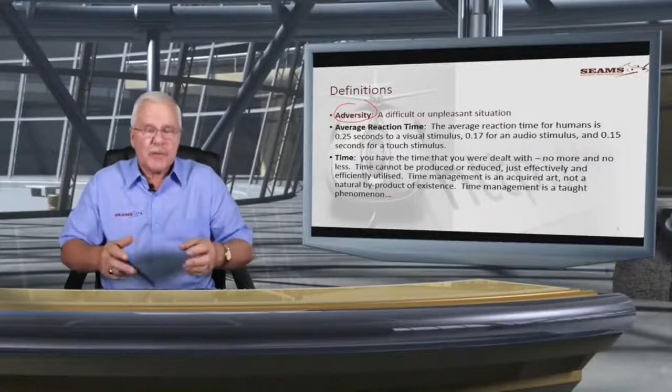All right, so before we start, there's one or two definitions we've got to go through. I'm talking about adversity. Adversity is simply a difficult or unpleasant situation. So when I talk about being exposed to adversity, it's the stuff that's not nice.

The interesting one here is the average reaction time. You know, for humans it's 0.25 seconds for visual stimuli. This is very interesting to me. Then it becomes less, 0.17 for audio, and 0.15 for touch.

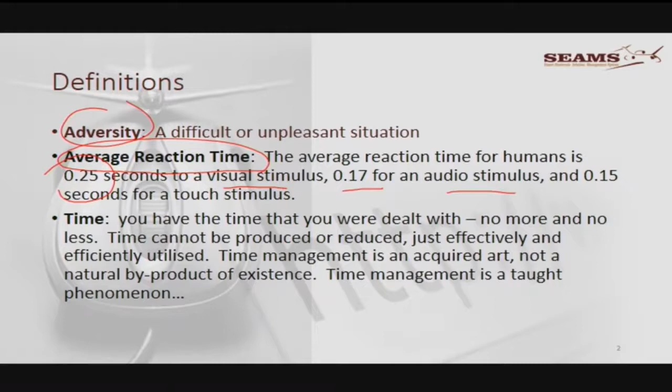Okay, so it's not just for ladies. Men, you're sensitive to touch as well. But what the hell is the problem then? Because that's quite fast. If we can react that fast, why have we got problems sorting stuff out?

Well, these tests are done under sterile conditions, where we're waiting for a light to go, and when the light goes, we react, when we feel this, when we hear this, and so on. So remember, these were tested under ideal conditions, and that's not where you and I fly.

It's noisy. We're after takeoff. We're busy cleaning up the aircraft. We're busy with power settings. We're probably busy with flap retraction. The passenger probably talks. The tower's talking to us. So that's one hell of a complicated environment.

Let me just put this cell phone here on quiet. Yeah, it's the way that we communicate, sorry about that.

All right, time—how long does it take then? You know that most multi-engine helicopters, when they do out-of-ground-effect single-engine tests, they give you 3 seconds. When they cut one engine, you can count 1001, 1002, 1003, and then the RPM will be at the optimum, but that optimum is also sort of the minimum optimum, and then you really have to react.

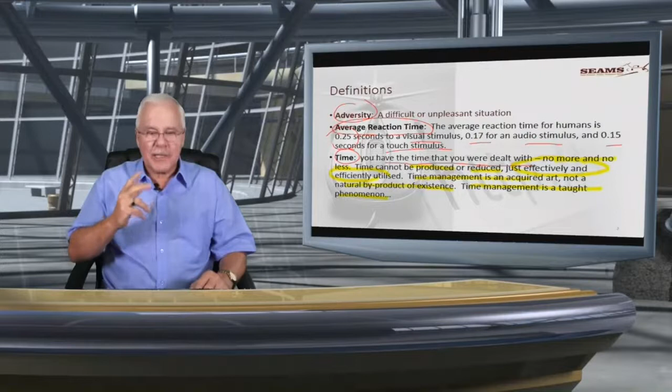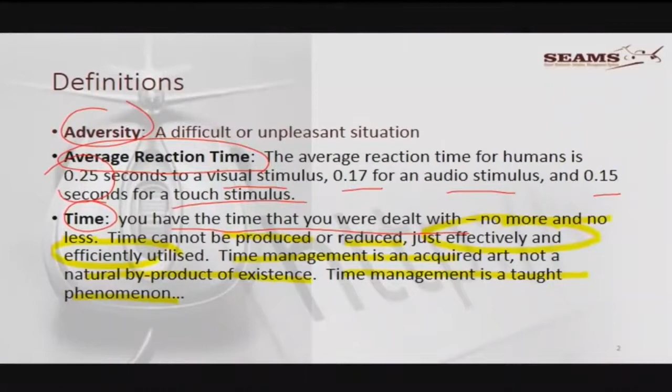Unfortunately, he succumbed to cancer.

All right, stimulus, there are just two of them I'm talking about. Remember, there's stimulus, physiological and psychological, so whichever it is, the ability of an organ to respond to external stimuli is called sensitivity. How sensitive are you? How alert are you? We might be, but if we understand the environment of stimuli, I think we've got a better chance.

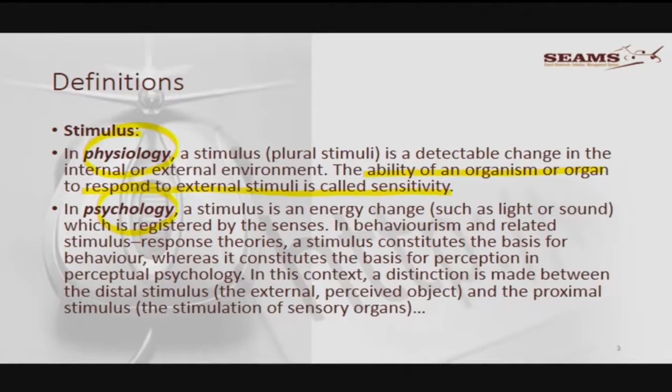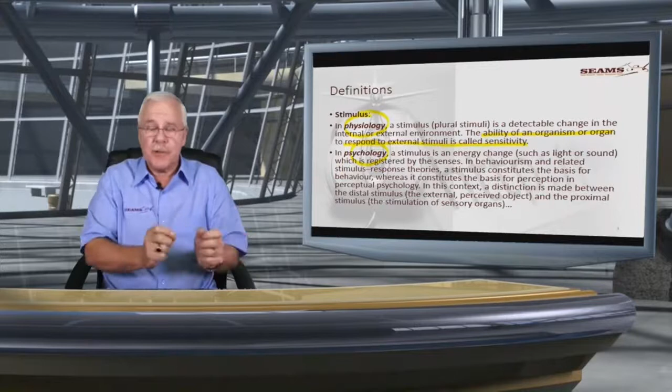Right, ladies? Gentlemen? Whatever. Okay. All right, let me not digress.

Then this question of anxiety. What happens at the other side of the spectrum? The doctors amongst you, and the psychologists and psychiatrists, can talk about it, but here I've got anxiety versus fear. It's often accompanied by muscular tension, restlessness, fatigue problems, and concentration issues. That's anxiety, which I understand has a longer build-up. But fear is what we experience in the shorter term.

The fear response arises from the perception of danger. It's not to say it's actual danger, it's the perception, leading to confrontation with or escape from, or avoiding the threat, which in extreme cases of fear, horror and terror, can lead to a freeze response or paralysis.

And that's the last thing we can afford, if something happens and we go into such fear that we freeze. We can't afford that. I'm not scared to go and fly. It's not a fear factor for me. I don't lie at night and sweat because I'm anxious that I've got to go and fly tomorrow.

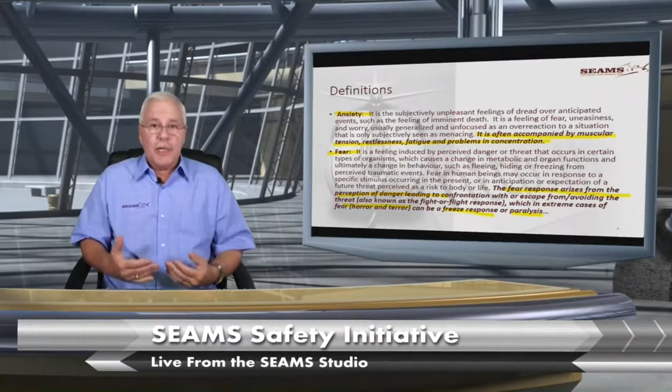In fact, quite the opposite, I enjoy that. When I do all the engine cuts with people, whether it's in a fixed wing or a helicopter, or the advanced stalling and stuff like that, I don't even know if my heart rate really goes up. I do concentrate 110,000% at that moment in time. Yes, that is so, because it needs that sort of input.

Do I get scared? Of course. I also get that bang, and the adrenaline starts pumping and all that kind of stuff. And then, when you get to my age, you come down and it's like, all right, it was just part of the deal. It's never really part of the deal.

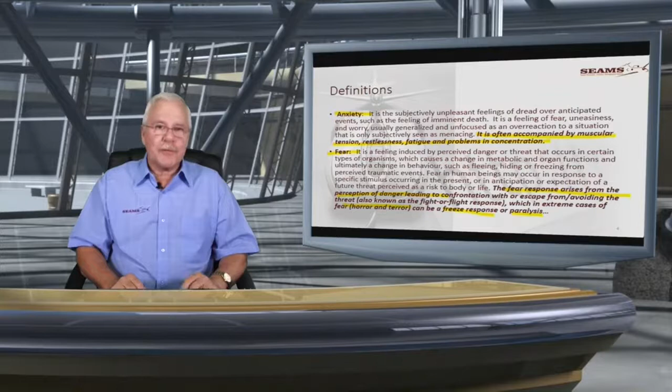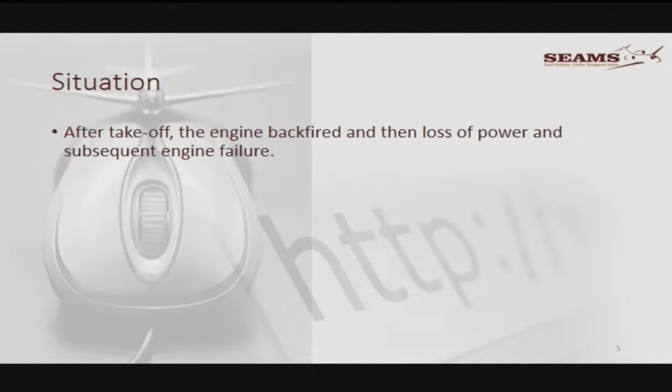Ask Wally or Conrad, the aerobatic guys out there. There are times you're just about, sort of, I won't say wet your pants because men don't do that, but we can crap in our pants. All right, probably not 100% true, but let's just look at a situation that happened here.

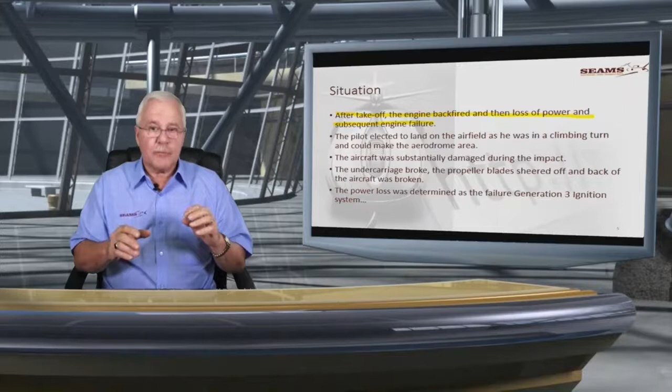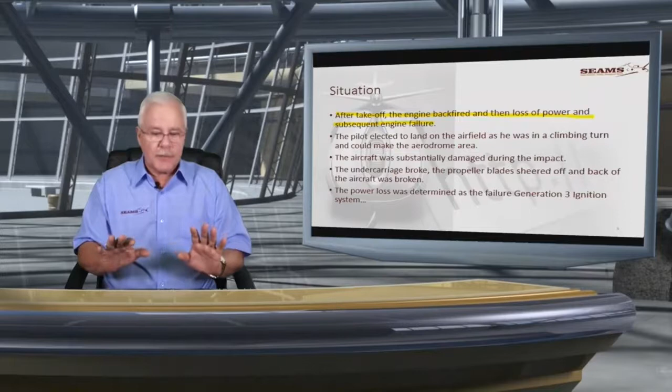After takeoff, the engine backfired, then lost power, and subsequently failed. I remember I get my information from the accident investigation done by CAA, so I don't put any extra facts in here, these are just the facts. Whether I totally agree with the facts, if I look at the evidence from the photographic side, is not necessarily so. However, the pilot elected to land back on the field, as he was in a climbing turn, and he said he could make the runway. Okay.

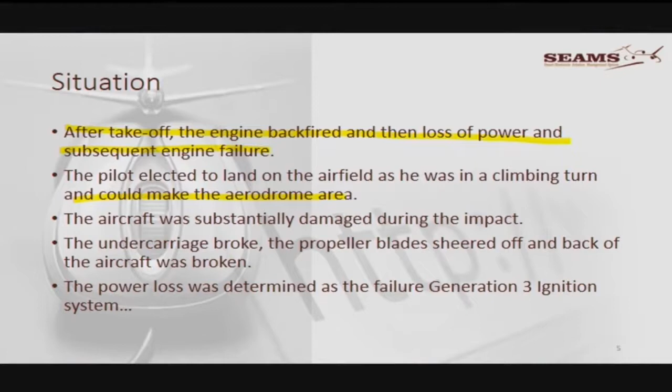So here we've got the situation where the pilot took off, engine cut, he was in a right-hand turn, the airfield was lying on his right, and he decided to go back for a landing. I don't think it would take...

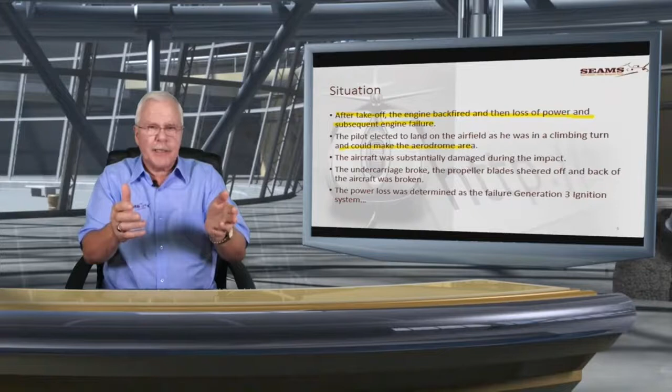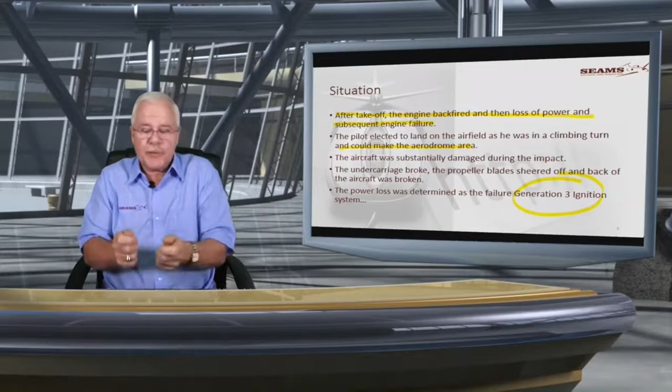In this case, you see there was a Generation 3 ignition system that apparently malfunctioned. I believe that is what happened. The pilot must then go over, as I understand it, to the normal system, and you actually have to put this Gen 3 off. You can do that, but he neglected to do that. Under the circumstances, well, I think I might have forgotten to put it off as well, because when stuff starts happening, to have a long think, I wonder what was that.

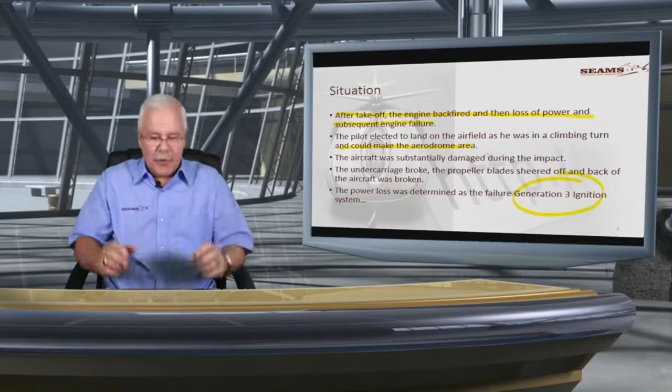While you've closed one engine, you can sit nicely on the other engine, and we can still climb to flight level 250, and then we can look at what we're going to do. Doesn't work like that in the single. When it goes, obviously we need to do our thing.

The undercarriage, the aircraft suffered damage during the impact. Undercarriage broke, propellers, and I'll actually show you what it looks like.

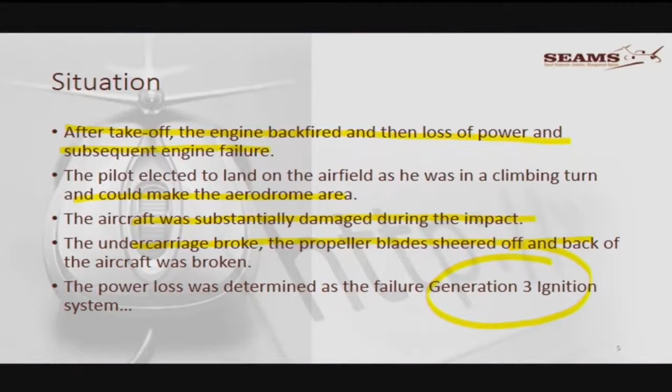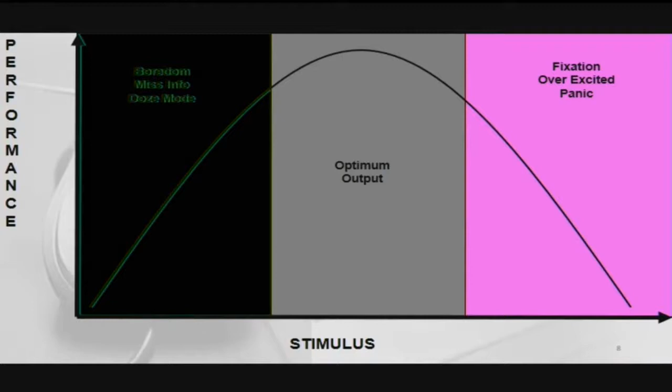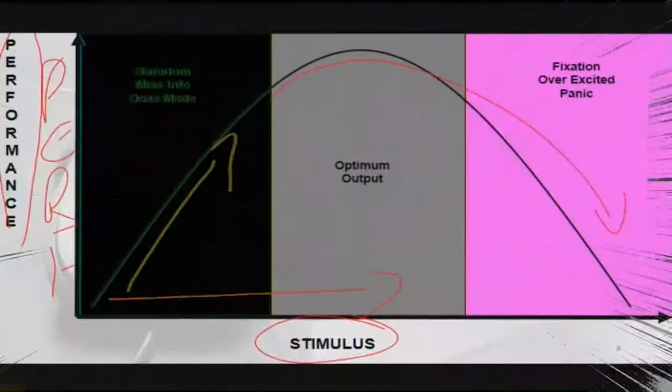Alright, let's first go to this fatigue and panic and all that kind of stuff. Here I've got the stimulus - yeah, the stimulus - and here I've got performance. So if you look at, you might not have it on there, but okay, on this side it says performance. So the more the stimulus, the increase of the performance. But there's a peak to it, and then stuff starts going literally pear-shaped, and you run out of performance until the stimuli is so high that technically the performance becomes a non-entity.

But if you look at here, you'll see there's a very nice area, because it's not like a pinpoint - at that point you can do this or that or the rest. But okay, let's go to the next one. The question always would be, how do we go from the - look, the first thing that's going to happen is, if you read the article in African Pilot, I could give a little bit of an explanation there - the first thing is that there's this bodily reaction that we were talking about. So when we say you're going to lose it yourself, it's probably true, and your performance is going to go down immediately.

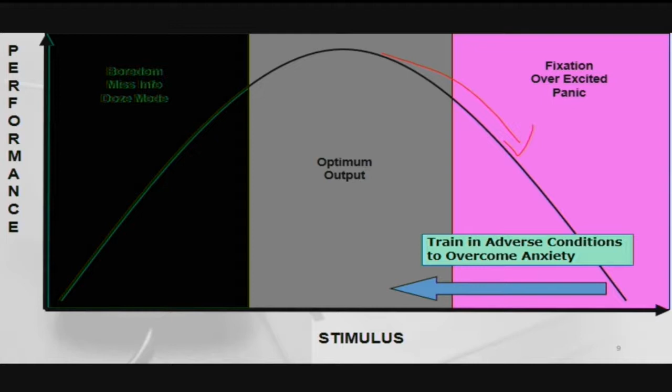Now, if we do training in this area, if we do enough training in the adverse areas, then it will increase our resistance to a performance loss in that area. That's why people sit in the simulators all the time. That's why the professional guys must be retested every 6 months. That's why we advise people to come for proper preparation - if it's helicopter, to go and do your rotations and your emergencies and stuff like that.

It's not stuff that you practice every day, but it's stuff that we really need to be able to brush up. It doesn't really go about the test - I know you can fly, but now I must release you for the next year or the next 2 years.

So the guys, let's get this right. The guys that do flying for a living, and they do it every day, they have to retest every 6 months, because there's a 6 month check and then your test at the end of the year. Your guys with a private pilot license, he tests and then for 2 years there's nothing. Doesn't make sense. Doesn't give us enough time to practice in this area.

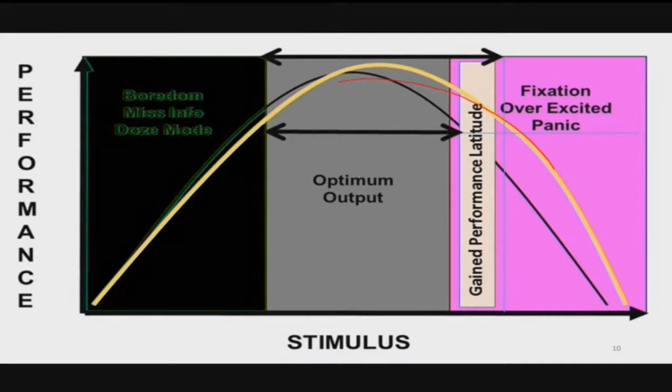Because if we practice enough in this area, then we've got the capability or the ability to actually widen this area of optimal performance. No, it can't be perfect. The idea is not for it to be perfect.

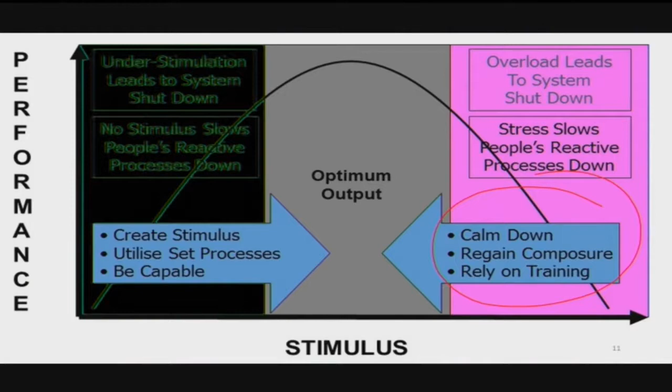If the poof hits the fan, calm down. Regain your composure and you rely on training. Okay, basically you can only rely on training if you've had the training. How do you get to training? You have to get yourself exposed to the training. No, you don't have to come to me, but you're going to have to go to somebody who will know how to handle these things.

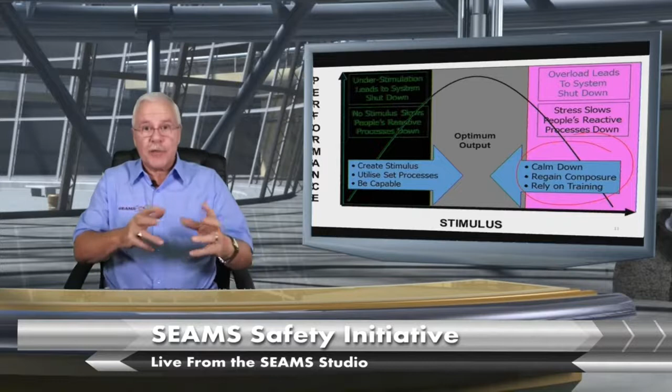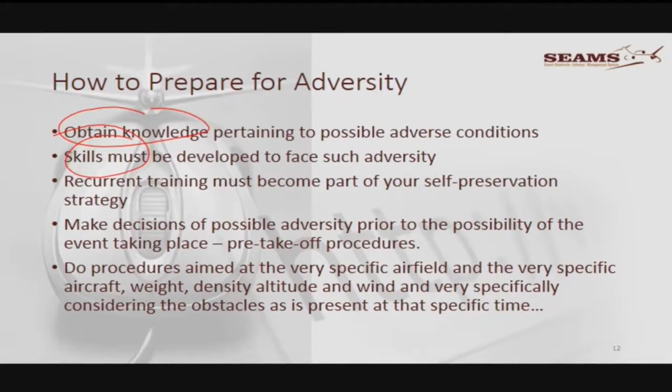How to prepare for adversity? Let me just go through a couple of those. Obtain knowledge - okay, you've heard that a lot, the knowledge and the skills, we won't get past that. Recurrent training must become part of the self-preservation strategy. I'm preaching this every month, saying get your training, get your exposure. Do you know how many people follow the advice?

Well, you can answer that for yourself. Make decisions about possible adversity prior to the event taking place. So before we take off, we do checks to see that if something goes wrong after takeoff, we already know, we've got a plan. We've already made a decision.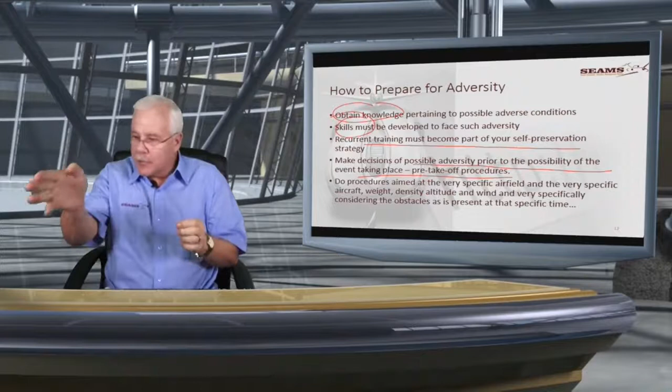At what height are we going to turn back? If we haven't got enough height, where are we going to go? Make a plan: I'm going to land there, I'm going to land there. But remember, that is particularly dependent on the area you are in, and I will demonstrate that now. The next thing is to do procedures aimed at very specific airfields.

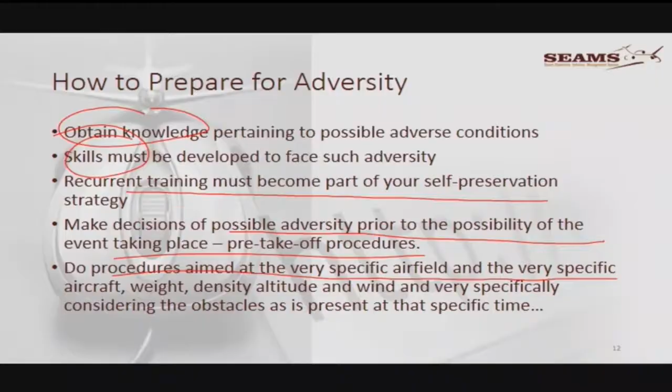Now let me just go. If we go to Tempe, for instance, and we're going to take off in this direction, there are very serious obstacles on the overshoot. And remember, there are power lines running on this side as well. So when I stand here and want to take off on runway 01, I'm going to say I'm going to do this and this and this. And if there's no more runway, I'm going to turn out right, I'm going to go there, or try to go there. If I'm high enough, and far enough away from this, I might even come back. But there are lots of other areas I can consider.

The point is, don't just take off and do a little rhyme, saying after takeoff, if there's no more runway, I'm going to land 30 degrees to the left or 30 degrees to the right. Really, give me a break. Tell me exactly where on this runway.

So let's take another one. Here we've got Grand Central. The overshoot area now is a total nightmare. This side is slightly better, but you do determine which runway you're going to use ahead of time. I just want to make sure that we give ourselves a better chance.

Rand Airport - this gentleman took off from here. He was in a right-hand turn, and then obviously he turned back. Now exactly where he touched down, I do not know. But if you go back to the Rand, you'll see that the overshoot areas here, right around, that's...

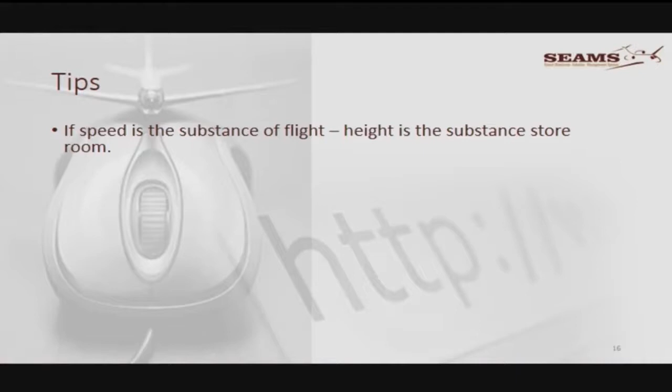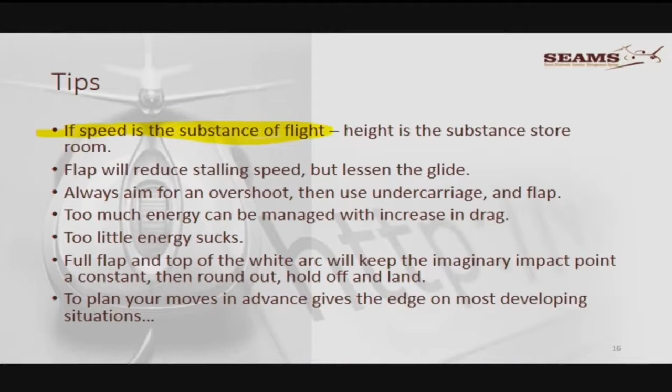Just a couple of tips here - listen properly now. If speed is the substance of flight, then height is the storeroom of that substance. You've only got three energies: mechanical, kinetic, which is speed, and potential, which is height. If you lose your engine, mechanical energy is gone. The only thing you've got to convert into speed is height. And if you run out of height, you cannot convert it into speed.

So there's no pointing fingers here. I just want to say that if you have the height and you use it right, you can have the benefit of arriving in a safer format. A flap will reduce your stalling speed - that's straightforward - but it will also lessen the glide. So we must know that.

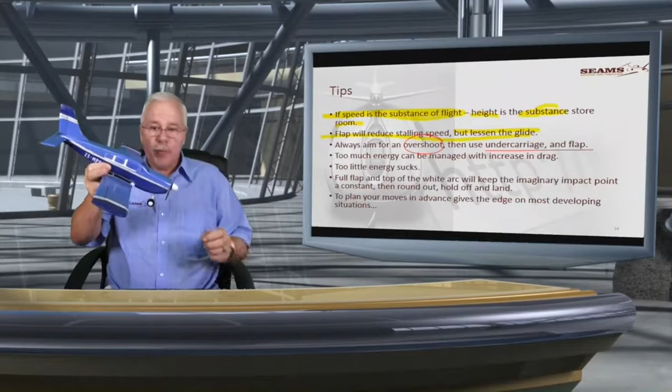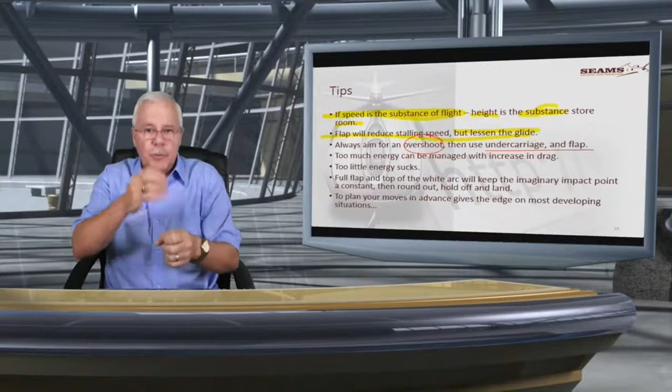Always aim for an overshoot, then use undercarriage and flap. Yes, always. If you take an aircraft and you've got an engine cut, if you start gliding without flaps, the nose will not stick to a certain point on the ground. It will creep over, and that point will move with you. If you've got full flaps and you're at the top of the white arc, then that theoretical point of impact stands dead still.

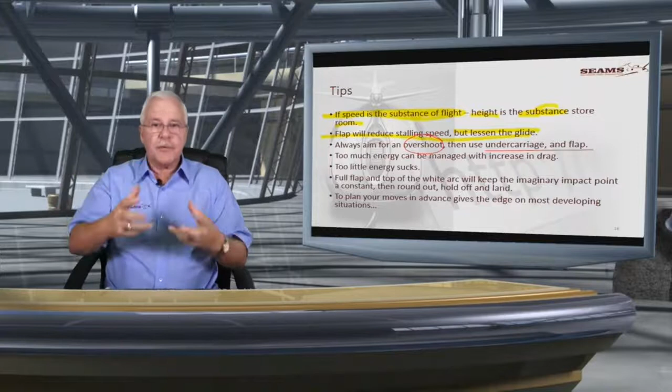Yes, you can go and try that. But don't get so mesmerized about the angles that you're doing that you forget to round out and take power and all that kind of jazz.

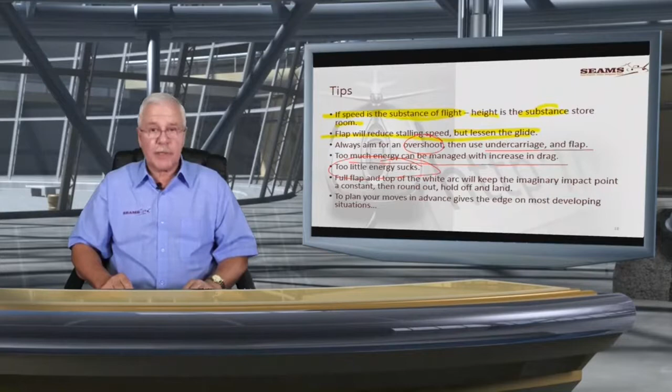Too much energy can be managed with the increase of drag, but too little energy sucks. It sucks at 9.8 meters per second squared, which is gravity. So gravity sucks. It's true. It's fact. It's science.

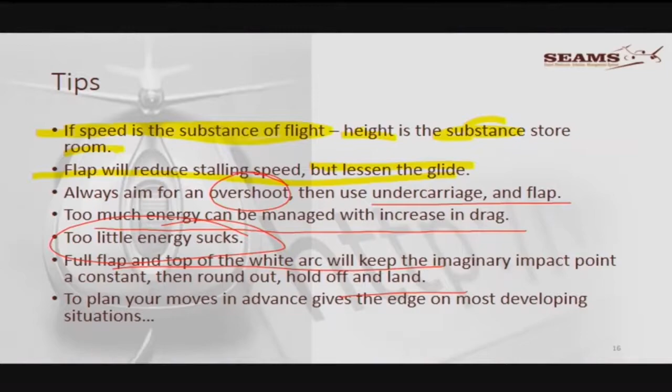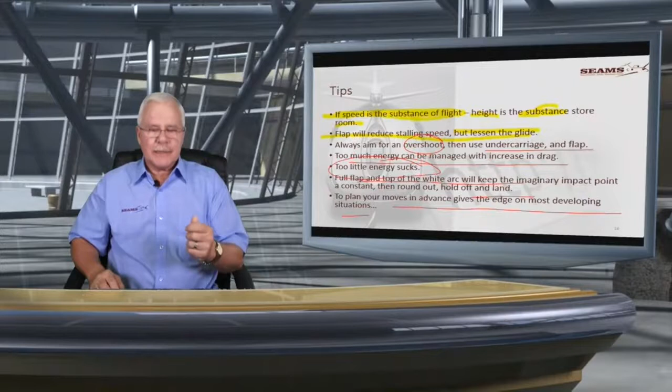Full flap and top of the white arc, as I said, will keep you there to plan your moves in advance, giving the edge in most developing situations. If you plan, the surprise is less. You're more on your feet, figuratively speaking, to think.

Just three things I want to say here. Stalling is a fact, it happens. Being in a situation where stalling may occur, that's a reality. To avoid a stall is an educated option. It is not luck. It is not luck.

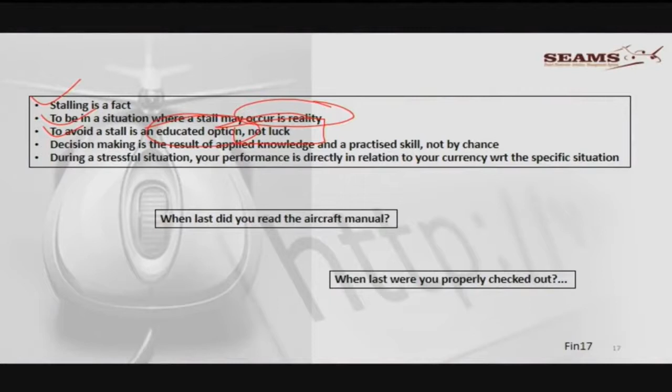Forget this thing about luck. What did Gary Player say? The more I practice, the luckier I get. It's the same for you. I'm not giving you any new information, I'm just pleading with you to understand what we're talking about. Decision making is a result of applied knowledge and practiced skills, not chance. If we practice it and we've been in that situation, you've got a damn fine chance.

I cannot believe it. People go into situations they have never been in, and sometimes they don't come out of it. And if they do come out of it, they think they're great. You're not great, you're lucky. You're stupid and lucky.

During a stressful situation, your performance is directly in relation to your currency. In other words, when last did you fly? Is there still a little bit of memory left in terms of the adversity that's coming your way?

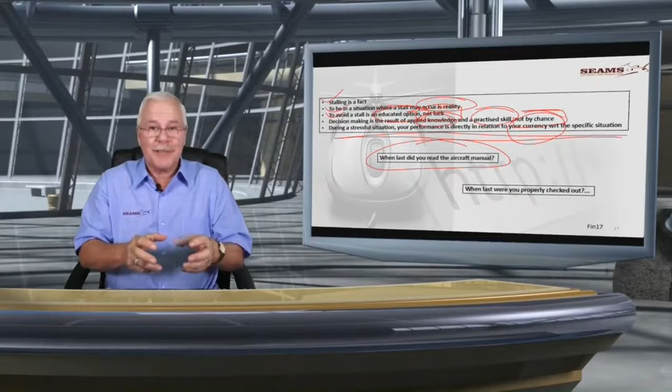When last did you read the aircraft manual? Don't answer me, answer yourself and ask: do I know everything? Am I still 100% sharp with everything? No, we're busy with other stuff.

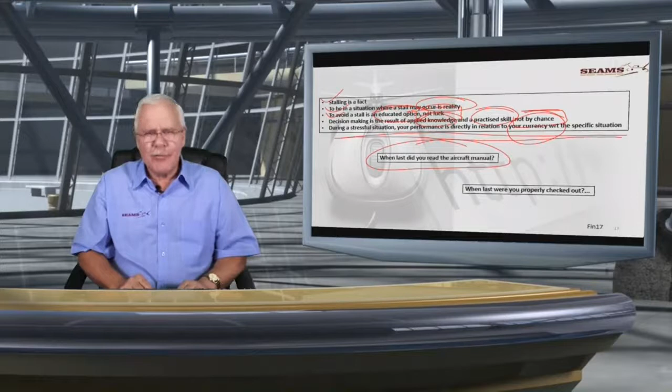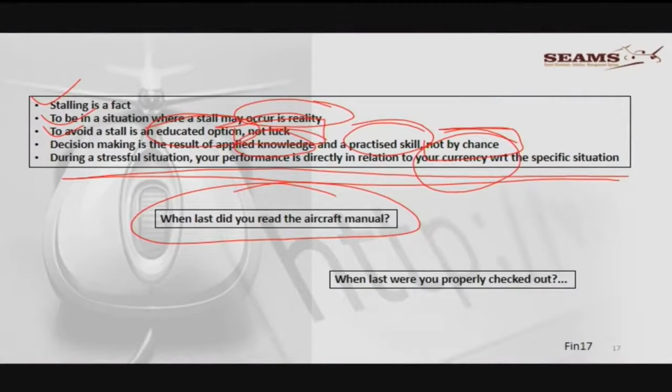I've got to reread the machines as well when you hop from one cockpit to another cockpit. It's not just your problem, it's all of ours. When last were you properly checked out? Were you properly checked out, or were you too scared to be properly checked out? I don't know, that is the one thing we must probably have a look at.